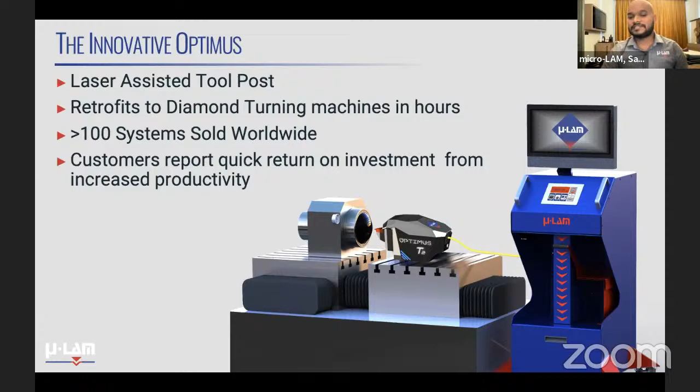Just to tell you a little bit about the Optimus so far, it's been sold in over 100 systems worldwide, primarily used in the infrared industry, as well as consumer optics manufacturing, which is another big market for us. It's a quick system retrofitted on diamond turning machines, able to improve yield from existing processes. The way this works is by utilizing a laser.

What's different about us, or the Optimus portion of Micro-LAM, is that we're able to implement a laser coming precisely through the diamond, right at the cutting edge, which changes the material properties right where the diamond and material interface together, making it softer. The diamond is still the tool that's primarily doing the cutting. In doing so, the laser is able to soften the material sufficiently to provide benefits of faster machine time, better yield, a more ductile process, and the slight added heat we impart is also removed in the form of chips coming off. Therefore, we do all of this without really changing the bulk properties of the material we cut. This is a patented system, and we're the sole sellers of these special tools specifically used on the Optimus.

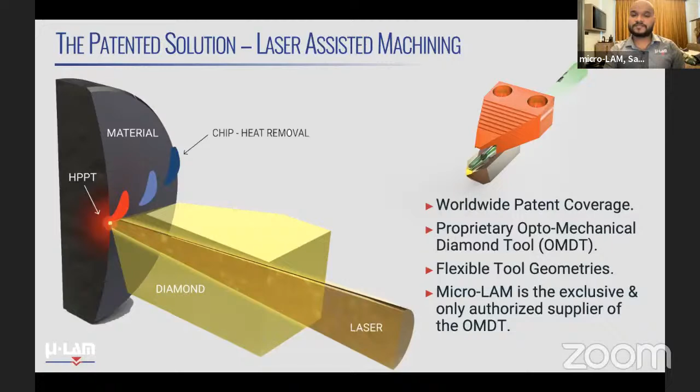So the new thing we're coming up with is what we're calling BOLT, Better Optics through Laser Turning. Essentially, we have a vision to be able to diamond turn glass. Previously, diamond turning glass was not possible.

Looking at the current challenges of traditional grinding methods, where you have forms on glass much larger than you could achieve with more deterministic processes such as ultra precision CNC or diamond turning, we hope to improve the existing way to produce glass through better form and better surface roughness achieved in the pre-polish stage.

This direct diamond turning of glass also imparts much less subsurface damage as opposed to the current grinding processes, therefore eventually minimizing the polishing time.

Not only that, because of the unique way of cutting glass using the diamond tool, we're able to add some of the features that a diamond turning machine can provide, such as mechanical features and more complex asphere freeform capability. If we have inflection points and so forth, it should be no problem for a diamond turning machine, making it overall easier to produce more complex glass optics for the future.

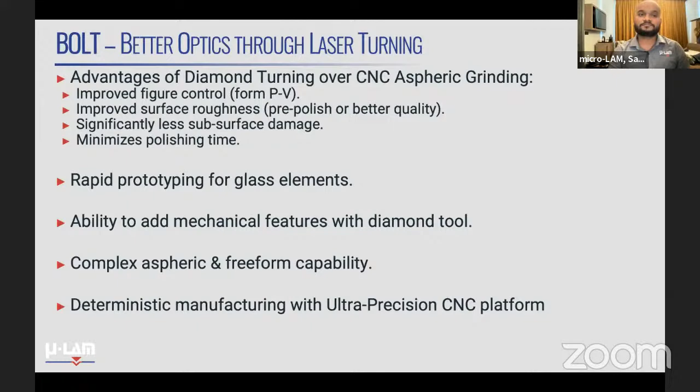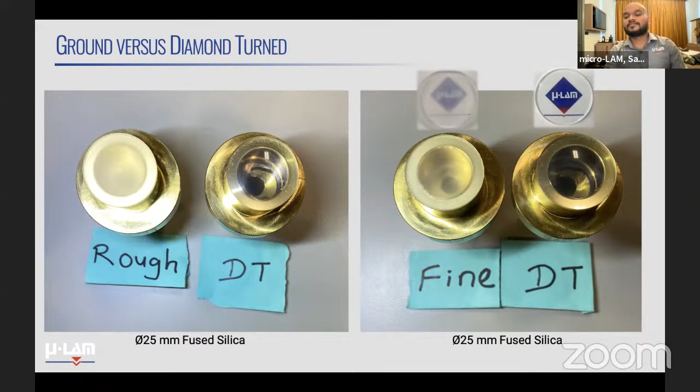These couple slides show examples of some preliminary results. On the very left is a rough ground sample coming off a generator, and just to the right of it is a diamond turned sample. To the right, you have another couple examples of a fine ground sample, and once again the diamond turned sample next to it. You'll see clearly there is a difference in transparency between these samples, giving a visual indication of the subsurface damage that existing processes create versus the subsurface damage that we impart.

It's quite a bit less.

Currently, our focus as a company is to target fused silica and BK7 materials with diameters ranging from 5 to 50, center thicknesses of anywhere less than 40 millimeters—a manageable aspect ratio for these lenses—and R numbers greater than 1.5 and so forth. We will be able to get down to an irregularity of lambda over 4, or about 150 nanometers, once we're done with the final polishing steps.

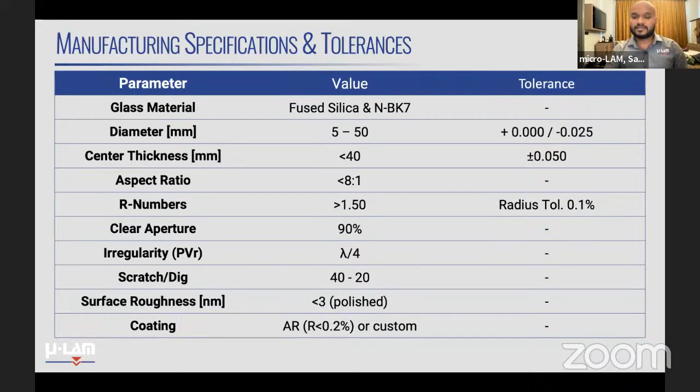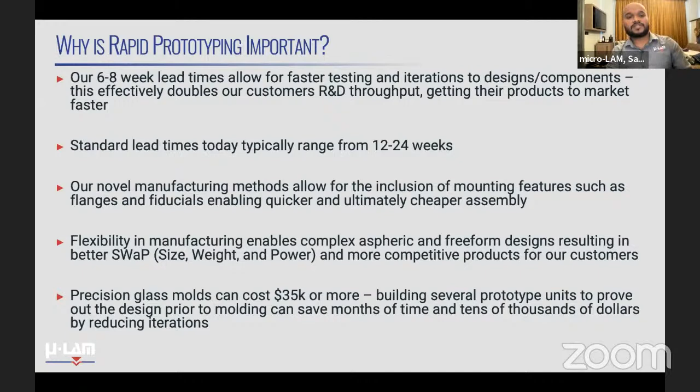So you would ask, why do this and why change the current way it's being done? Especially now with quite a lot of increase in glass prototyping needs, the lead times with existing glass manufacturers have really gone up—anywhere from 12 to 24 weeks, depending on your material type and how complex it is.

This new approach allows us to get lead times within 6 to 8 weeks, which gives you more cycles for initial prototyping and therefore the ability to eventually deliver to market faster using the service that we would provide.

Essentially, right now, if you go through conventional processes, your precision glass molds can cost 35,000 or more, and trying to build several prototypes would just mean more and more cost. Eventually that would come down, and the big advantage is better SWaP—size, weight, and power—performance using our method.

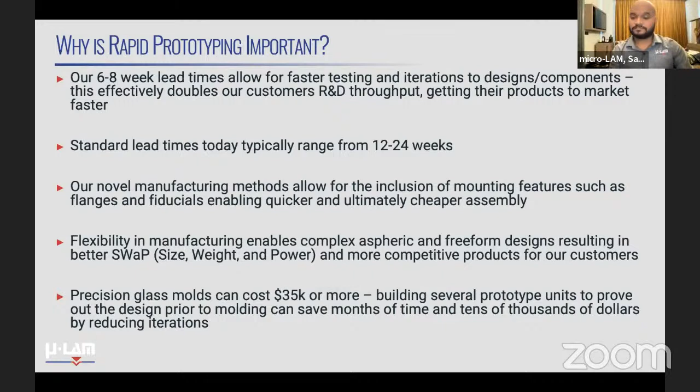And yeah, that's all I have.

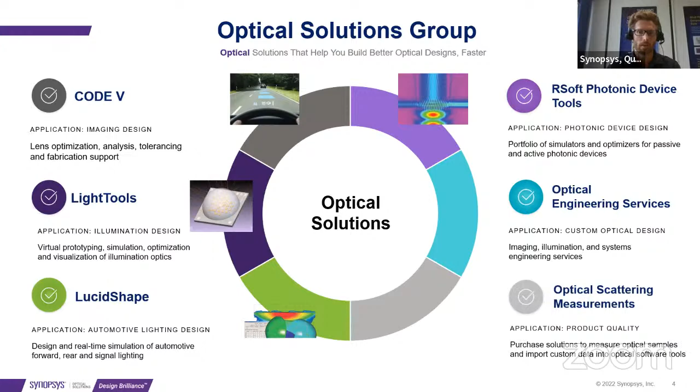So why I'm here today is to speak about one field of application of the Optical Solutions group: optical scattering measurements. Synopsys acquiring Light Tec 2 years ago was mostly for our hardware capability of doing optical scattering measurements. I'll focus on that and the new product that we have.

I'm located in France, and in this French office we have a lab fully dedicated to measuring optical scattering on surfaces and materials. Basically, we just shoot some light on surfaces and materials, and we look at where the light is going. This is used by optical designers or plastic, aluminum, and diffusive sheet manufacturers in their everyday life to get info on what they're designing and what they're manufacturing.

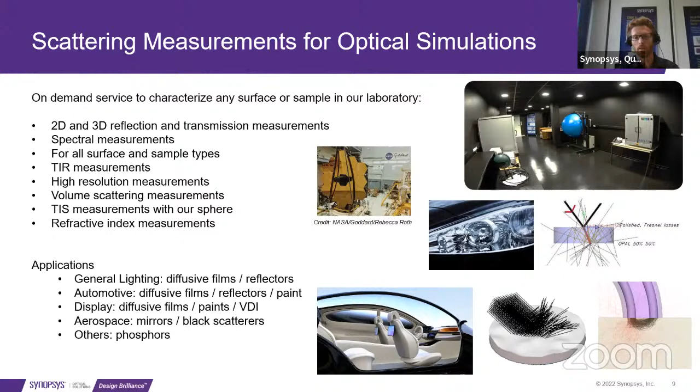So applications are extremely wide. Automotive is a big one, along with display, aerospace, and some others.

Today, our existing portfolio consists of 3 instruments dedicated to what we call BSDF measurements, meaning looking at the angular scattering of the surface. We have the Mini-Diff V2, which is our entry product, the MiniDiff Pro, which is kind of a laboratory version of the Mini-Diff V2, and our high-end product called Reflet 180S, which is more of a goniometric solution compared to the other two that are camera-based.

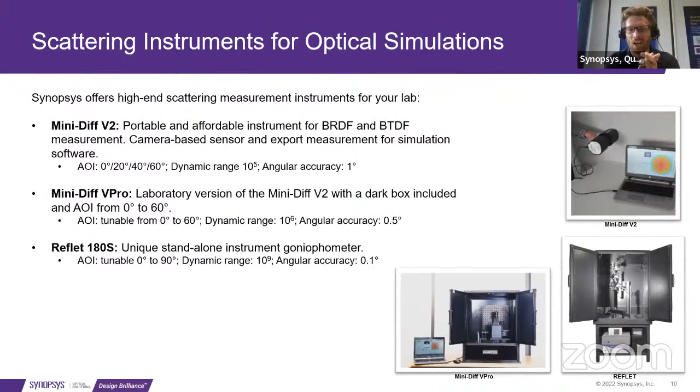So all 3 of those instruments are not new. They've been existing for many years, and they only consider where the light is going.

The needs for those are—I'm mentioning 3 here, but there could be way more. Of course, the first need is to set accurate optical properties for designers in their optical simulation software. You could use those to do R&D and to design the right material, or you could even do quality control in your manufacturing process. What comes out of your manufacturing process at the beginning of the day should be the exact same as what's coming out at the end of the day. So our solutions are used for that, to control the optical scattering.

On top of those 3 instruments looking at angular optical scattering, now I'll focus very quickly on the new baby of this instrument portfolio, called TISPRO, which works very closely with the other 3. That's a solution that we've had in our lab since the beginning, but we decided to make it available for users of our other instruments, and they work very closely together.

The 3 previously existing instruments look at the angular spread of the light, whereas the new TISPRO looks at the amount of light propagation, wherever the light is going. So it basically measures reflectance, transmittance, and absorption values of surfaces and materials.

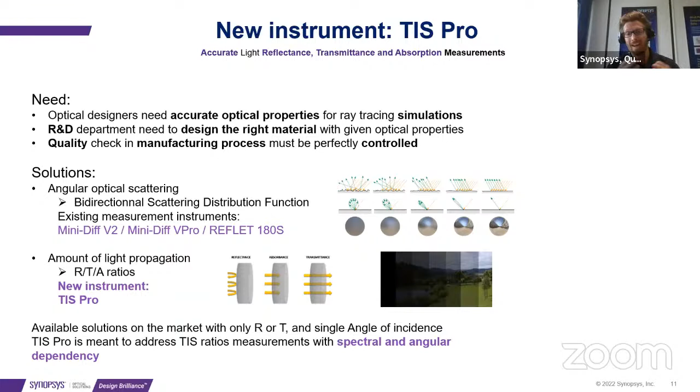One of the key things of this new product is, of course, the spectral dependency that you can find on other solutions. But one more key criterion is the angular dependency. You may find many solutions measuring RTA and absorption values on the market, but almost all of those are focused on a single angle of incidence, so only a single light direction on those materials. Our solution offers the opportunity to have angle-dependency measurements.

The principle is extremely easy—that's what our instrument is intended for. And it's a good thing that it's easy to use too. We have, of course, a calibrated standard and a guided procedure that comes with the instrument, to make sure that you get the most accurate measurements.

The key thing here for the angular dependency is the custom sample holders and the automated source. All of this is controlled by your software, and out of it you get the spectral dependency and incident dependency of reflectance, transmittance, and absorption of the surfaces and samples you want to characterize.

The high dynamic measurements allow a wide range of sample measurements, from mirrors for the space industry to very black and diffuse surfaces used for stray light reduction, for example.

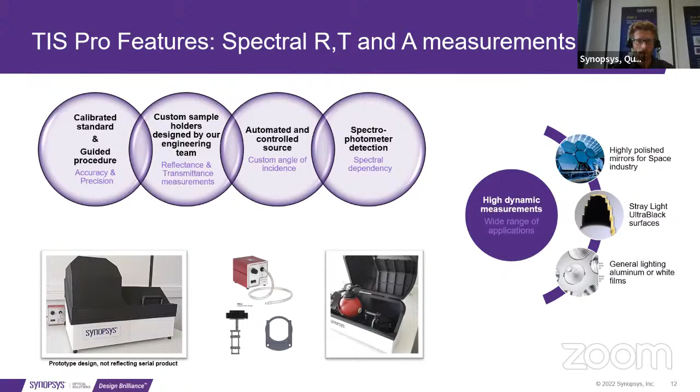Let me now show you quickly the software and the process of measurement. I think it's very easy to use, and that's a key point too. Parameters have to be adjusted first, and then it's a two-step calibration done on a reference sample. Then you just replace this calibration sample with the sample you want to measure, select the angles you'd like to measure, and just let it go. What you get at the end is both an angular dependency TIS, or reflectance, transmittance, or absorption measurement, together with for each individual angle of incidence, the spectral dependency.

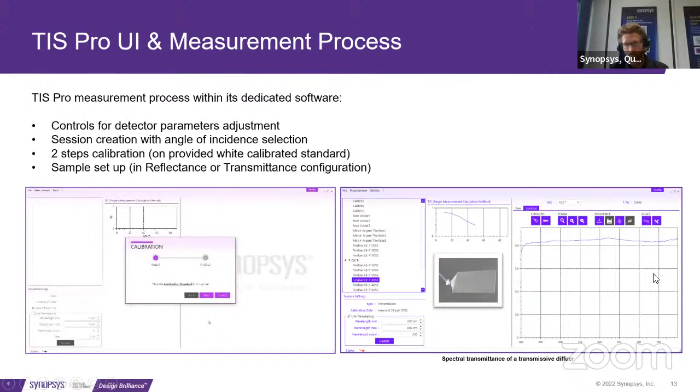I'll finish this new product introduction, TIS Pro, with some specifications. What it offers is definitely accurate measurements of reflectance, transmittance, and absorption for optical designers. On top of having a solution for BSDF measurements, or angular dependency measurement, now they can go and do RT and A measurements together. It's fully automated, with spectral dependency and angular dependency at very high accuracy.

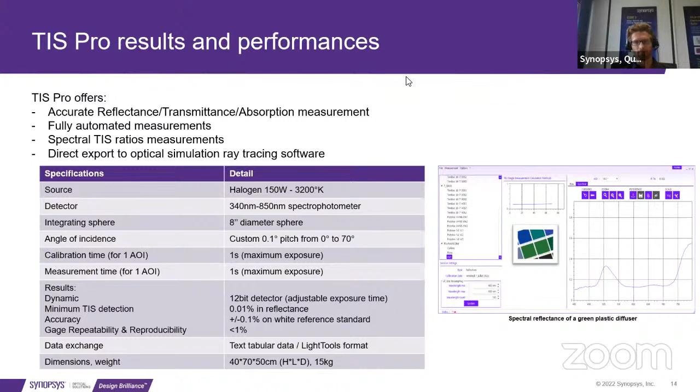Not with the actual solution. We released it just a few days ago, and for now it's only visible spectrum. You may have seen in the spec - it's visible range, slightly before 400 and slightly after 800. The roadmap for that product, before putting near infrared spectral detection, would rather be on adding options for gloss and haze measurements. That would be the next development on that product. And then, of course, the opportunity on the detection side to go for near infrared, but not right now.

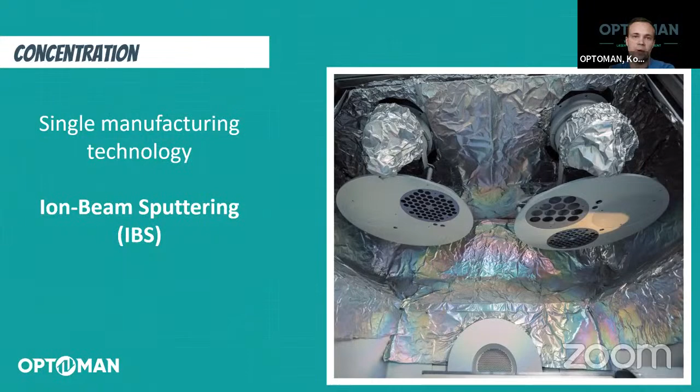I have also an announcement to make: OPTOMAN has a new family member. She's called Wanda, and you guessed it right, this is the name of the third IBS machine.

Now about the mirrors for multipass cells. I must make a short background on why this product is important and what is so fancy about it. MPCs are used for optical pulse compression by spectral broadening in noble gases. This is due to self phase modulation based on the optical Kerr effect.

Spectral pulse broadening is a common practice for most femtosecond lasers; that is how CPA technology works. Though most industrial ultra-fast lasers can reach average power of around 100 watts with optical pulse width of several hundred femtoseconds, typically here is where CPA technology is limited to the gain bandwidth of the laser media. The same rules apply for high-intensity scientific systems, where we are limited by the initial pulse to amplify it afterwards.

The main problem here is the trade-off of average power against pulse energy, or vice versa. Using standard gratings or hollow core fiber solutions, you cannot have both high average power and high pulse energy. This is one of the reasons that limit ultra-fast laser applications in some industries. To overcome this limitation, the MPCs are a perfect solution.

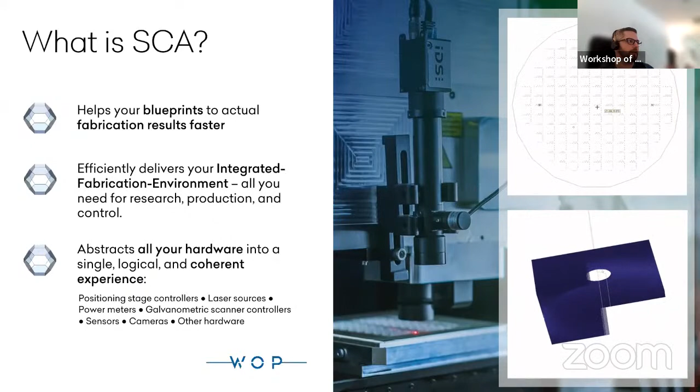Why might you need our software product? One of the most important and overlooked things is you don't actually need to learn any of the manufacturer-specific or universal scripting languages to control the movement of the hardware the way you like. We have created a very simple interface that allows you to use commands that are easy to understand and arrange them into various algorithms in a very natural way.

One of the recent additions, answering the question of why you want to remotely monitor your system: we recently introduced an Android application available on Google Store that you can download. Unfortunately, to test it, you would have to contact us. But it allows you to see what your machine is doing, when it's going to be done with the current tasks, and what the status is.

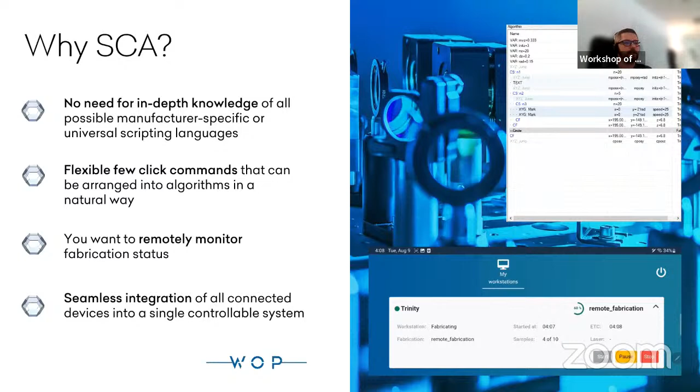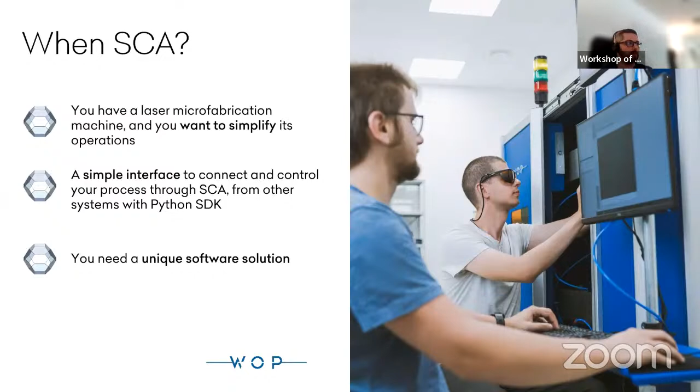When might you want a solution like this? Simple: you have a micro fabrication machine and you want to simplify its operations and use. We can also offer you an interface using Python SDK for now to communicate with other systems. And we think we are very unique in that we are flexible, and we are very eager to learn and do more with less. So we can offer you a unique solution if you have a problem you are unable to resolve.

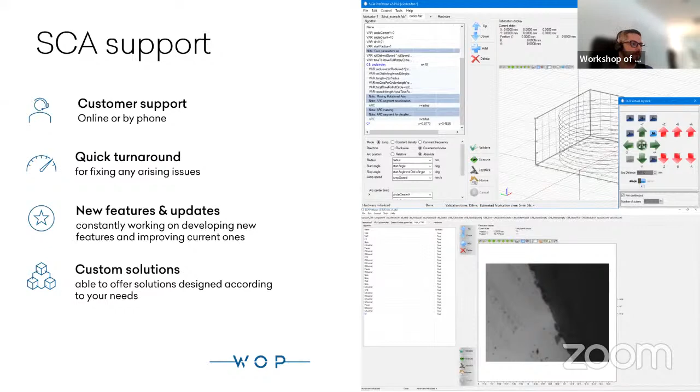As all good software products, we have to support it. So we offer support using a phone or online, and we reply the same day. We have a pretty tight release schedule, doing major updates every quarter - major like new hardware or new features integrated into our solution.

I have to talk about what's next, because that's the most exciting thing for me. The workshop of Photonics has been building laser fabrication machines for quite some time, and the software that was developed in the beginning was developed using current day technology.

One of the first really big steps we are going to take is introducing a new architecture, a new way of thinking about how software should work, how quickly it should work, and how easy it should be to maintain. Using lessons we learned looking at, let's say, Linux, we think that by introducing the new architecture, we can essentially double the rate at which we integrate new hardware into our ecosystem.

We also really want to work with industrialists. This summer we created a proof of concept where we performed a femtosecond fabrication process using a manipulator arm to automate the placement of samples, and machine vision to align it properly. We really want to continue moving along this path, and we will definitely be expanding our capabilities when it comes to automation. Remote diagnostics is another feature we will hopefully be introducing next year.

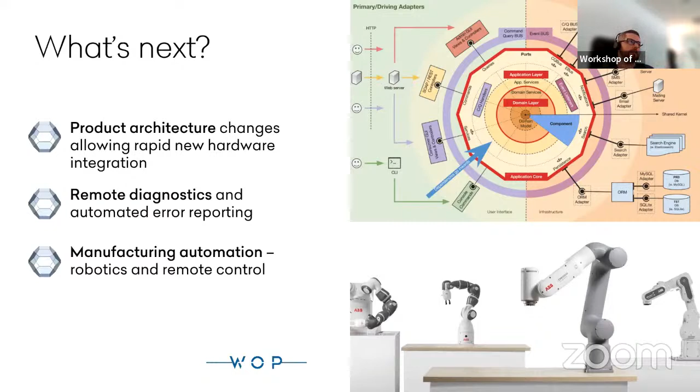We visited quite a few shows and expos in the photonics industry, and this is something we think is very important - allowing not only the use of current features we have by monitoring the fabrication, but monitoring the system, predicting maintenance, and saving money.

Also, thinking about industrialists, we think about a big system of many machines working together. So we are thinking about an ability to consolidate all your systems into one experience that you will be able to monitor - getting data, analytics, easier planning, and things like that.

One of the most important things in our roadmap is new hardware. We must expand - we have to support hardware that maybe no one else supports, or that you're using and need help with. So: ACS, ScanLab, Keyence, and Aerotech's new Automation One platform.

So this list is just a small part of what we're planning. Just to give an example, using new integrations with ACS and ScanLab, this year we constructed a machine running on ACS and ScanLab hardware that is capable of working with 2 scanners at the same time, and everything, literally everything, is controlled using our software.

That makes things a lot easier. Also, from our experience with automation, we think machine learning integration for quality control and metrology is also very important, as we are a laser application company at first. We have a big laboratory, and sometimes we have to deal with inspecting the quality of a product that has, let's say, 17,000 objects on it that need to be checked. So I think a solution like that would make life a lot easier for us and for you if you will be willing to work with us.

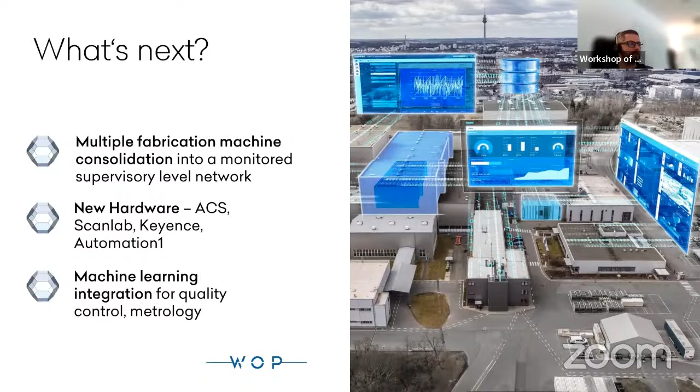So a big road ahead. Hopefully I can position the product as a project. We are looking for friends. We want to work with you. We want to hear your ideas, and maybe together we can build something truly unique. Thank you, that's me for now.